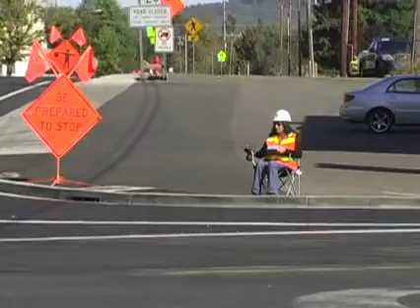It's important to conduct traffic volume studies, also known as traffic counts, because these counts are fundamental for all traffic engineering decisions within the Indian Reservation Road Program. And these counts directly affect how much funding can be generated for road or pathway maintenance and improvements on your reservation. Traffic counting is a basic planning tool that helps you to identify and prioritize current needs and forecast future needs. Traffic counts can ultimately lead to better quality roads that mean safer transportation for your tribal residents.

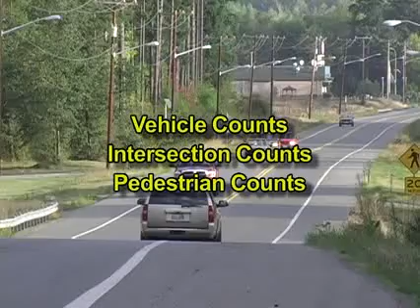This program provides a basic introduction to traffic counts and includes demonstrations for vehicle, intersection, and pedestrian counts. We'll show you the proper way to set up a traffic counter for vehicle counts and other equipment setups for other kinds of counts. We'll also show you how to download and process data that has been collected in the field.

Vehicular traffic counting results can include volume of traffic, direction of travel, vehicle classification, speed, and vehicle types. The Indian Reservation Road Inventory requires you to log both volume and vehicle classification.

When should traffic counts be conducted? As soon as possible. Counts can be performed any time of the year and in any type of weather. Counts on all roads should be kept current at a minimum of once every 3 years and preferably more often. Counts are usually done over a 48-hour period or longer. For inventory purposes, these should be done on what's known as representative days. That is, Tuesdays, Wednesdays, and Thursdays that avoid high or low volume days such as Mondays, Fridays, holidays, and weekends.

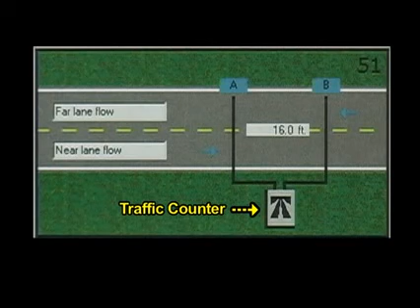Where should traffic counts be conducted? Traffic counts should be done at locations that provide uniform traffic flows. In other words, where vehicle speeds are unlikely to change as they cross the counter. For example, you shouldn't set up a traffic counter within 600 feet of a traffic light, intersection, or curve.

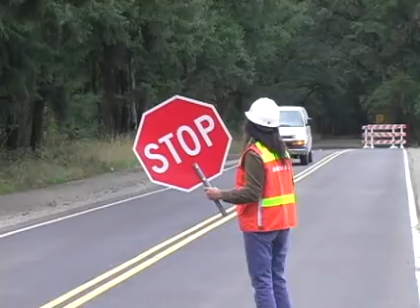To count the number and type of vehicles traveling a particular road, we'll demonstrate how to set up an electronic counter and road tubes. First, for your own safety and the safety of motorists in the area, you must wear a brightly colored safety vest while working on or near the roadway, and a hard hat. And in cases of high traffic volume or dangerous traffic conditions, we recommend using a flagger to allow traffic to flow safely while you are working. In addition, you must install a traffic control device 500 feet on either side of the work area. This is a sign advising motorists there is a worker ahead.

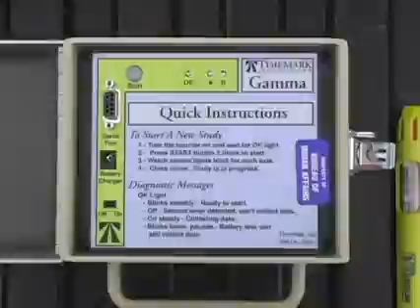Most of the tools and supplies you'll use to set up a traffic counting station can be organized and carried in a suitable case or bag, like this one. To install the counter, you'll need a sledgehammer, claw hammer, gloves, tape measure, chalk, and of course, the counter, with a fully charged battery, and 2 50-foot lengths of road tubes with chain and padlock. The expendable supplies that will be used include the following: 2 end plugs, 4 figure-8 clamps, 10 2.5-inch PK nails, 2 6-inch pieces of webbing, and a roll of road tape.

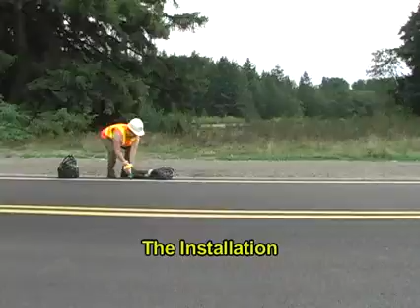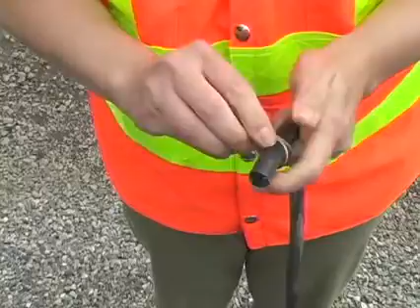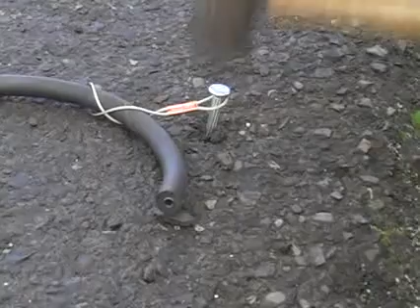First, you'll want to prepare the road tube by installing end plugs in one end of each of the road tubes. Next, you'll install the first figure-8 holder on the first tube. You slide that on about 10 inches from the end so that it will grip the tube. Then you'll nail that down to the edge of the pavement with a 2.5-inch PK nail, leaving a gap about the size of a penny. That makes it easier to extract it later on with the claw hammer.

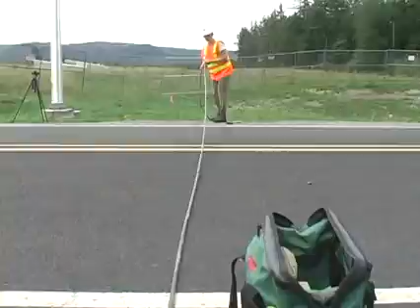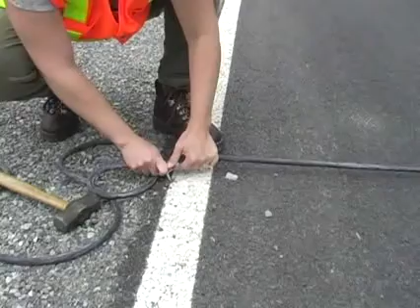After you have one side of the tube fastened, drag the hose across the roadway perpendicular to the traffic. Install another figure 8 onto the other end of the hose, and this one you'll need to slide down the hose and stretch it until you have a slight amount of tension in the tube. Pull on the hose a little more to tighten it a length that equals about 10% of the road width. And then you're ready to nail it to the asphalt.

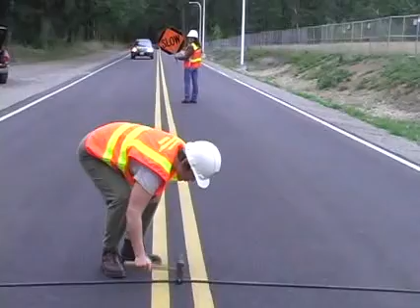To keep the hose from stretching excessively when it's hit by a vehicle, nail down the center using a length of nylon webbing. Just wrap it around the hose and drive a PK nail in on the center line. The webbing doesn't have to be really tight, just enough to stabilize the hose so it won't move when a truck runs over it.

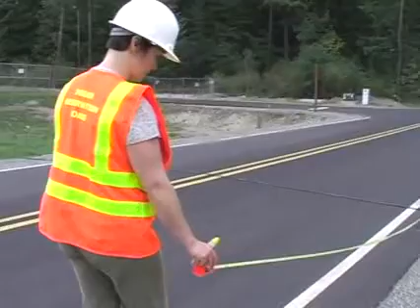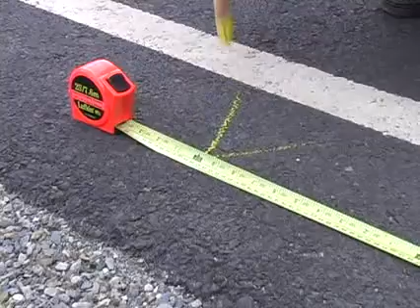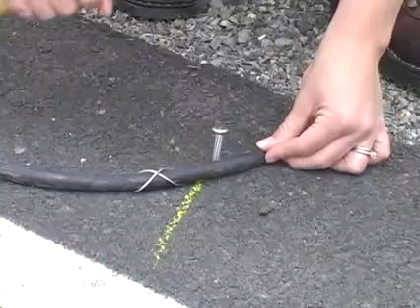Now you're ready to install the second hose. Every counter manufacturer has an optimum spacing for road tubes, and in this case the optimum spacing is 16 feet. So measure and mark that distance. Then get the second hose and prepare it by putting the figure 8 on it. Fasten it to the pavement with a PK nail as before.

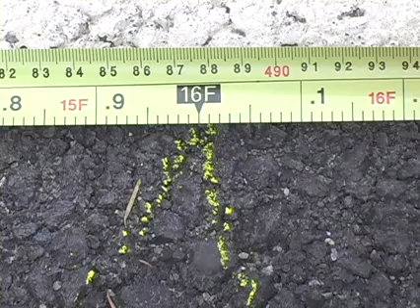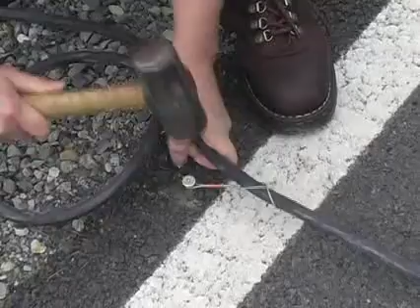Once that's done, stretch the second hose across the road and pull it tight. Measure and mark another 16 feet for proper placement. Slide another figure 8 on until it's a little tight. Then move it in another 3 feet or so to get the proper tension. Fasten it to the pavement with a PK nail as before. Again, nail down the center to stabilize the hose.

Once you have the hoses installed, you want to check and make sure you have enough tension in each line to keep the vibration down, and pull them to tighten if it feels like they need a little more tension. Then slide the hose through the figure 8 until it feels right. Finally, tape each tube to the road surface with the pavement tape placed between the wheel paths to further keep the tube from moving when vehicles pass.

And now you're ready to install the traffic counter. Open it up and turn it on. It'll perform a brief self-test and then tell you that it's ready to operate. To attach it to the road tubes, you take the rubber environmental caps off and insert the hoses onto each nipple. Now you press the start button 3 times, and now it's ready to start the count.

Now you test the system to see if it's collecting a count. You do this by having somebody stomp on the tube and watch the A light or the B light light up, depending on which tube they're stomping on. Or you can wait for a vehicle to go by, and then watch the light-emitting diodes flash.

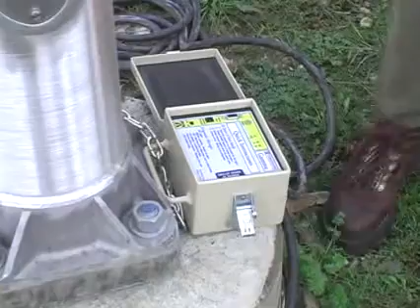Once you confirm that the counter is operational, fasten it to a pole, signpost, or light standard. Drop the chain through the handle on the side of the counter and securely lock the cover so that it's watertight. Pass the padlock through the chain and through the cover lock so that nobody can open the counter and turn it off or remove it from the location.

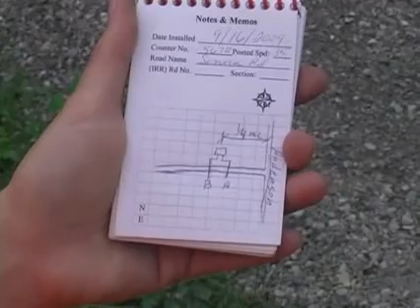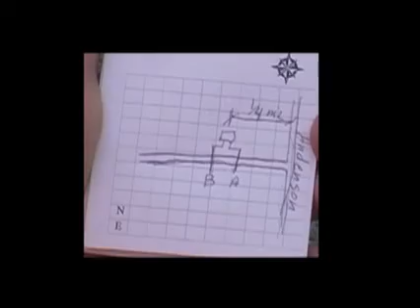Be sure to record the counter's location by making a sketch of the road system and marking the counter's distance from the nearest intersection. Also indicate the orientation of the A and B hoses so that later on, when analyzing the data, you'll know whether you're looking at traffic that's going east and west or north and south. At the top of the page, record the date you installed, the counter's serial number, the posted speed of the road, and the road name, so that later on in the office, when you're downloading the data, you'll know exactly which count you're dealing with.

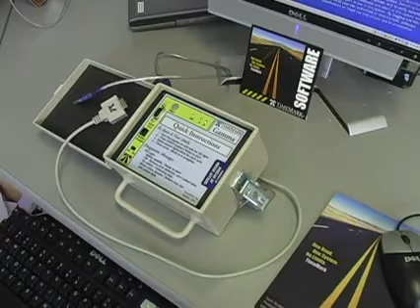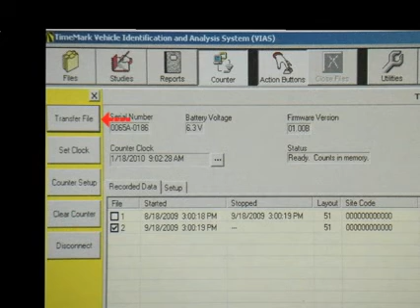Back in the office, you're ready to download the collected data from the counter to your computer. Each traffic counter manufacturer has its own software for downloading data. Open the counter software on the computer. Then connect the counter to the computer and turn the counter on. From the top menu, select Counter. Each different traffic count done in the field shows up on screen as a separate file. Select the file you wish to download, then select Transfer File from the left side menu.

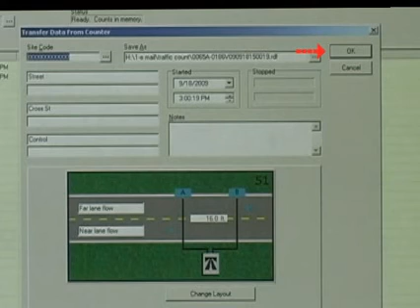A new transfer file window opens in which you enter the information asked for. In the site code field, put the street name. Under Street, again enter the street name. Under Cross St, enter the name of the nearest road that intersects your road. And under Control, enter the posted speed for that specific road. Under Notes, you can record minor details that may be needed in the future when analyzing this data. Then, in the upper right-hand corner, hit OK.

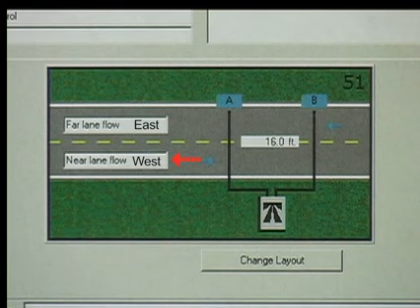A new window opens which requests file details. Verify the spacing of the hoses, which is 16 feet for our counter, and then for the traffic, signify whether it's traveling east, west, north, or south, so that in the future you'll know which direction the traffic's moving at this location. Then select Save File from the left side menu.

The Save As window opens where you can name the file before you save it. It's good to name the file using the IRR number, section number, followed by the year, month, and date of the count. Then select Save and the data will be saved to the hard drive.

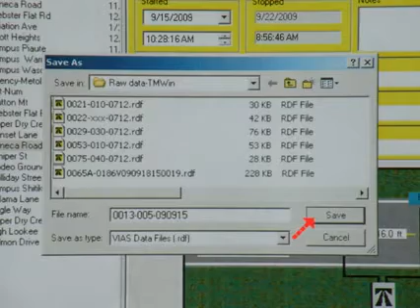The next step in analyzing the data is to do a study on the count. First, highlight the file you want to study, then select Load File from the left-hand menu. A window called Analysis Wizard opens. In that window, select what you want to do with the file. You may want to check the vehicle volume and classification of the vehicles in the count.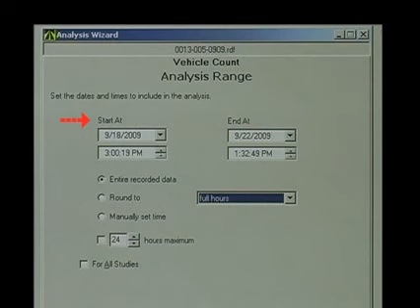Then you would hit the Next bar at the bottom of the window. The next screen in the Analysis Wizard opens where you would verify the start and the finish times you want the data to show. Then you would hit the Next bar at the bottom of the window. It'll ask you for the axle count time. Select OK. You can use the same start and finish times as used for the vehicle count.

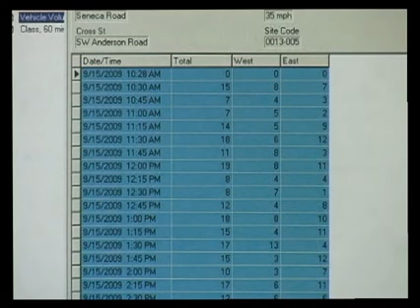Now the actual raw count data are displayed on the screen by date, time, and number and types of vehicles. The next thing you'll want to do is publish a report on this data. So highlight the type of data you want to report and then select Reports from the top menu. Choose View Report from the left menu, which opens the Report Wizard. This window asks you how you want the data presented in the report. What we want to use is hourly volume, weekly, 2-channel.

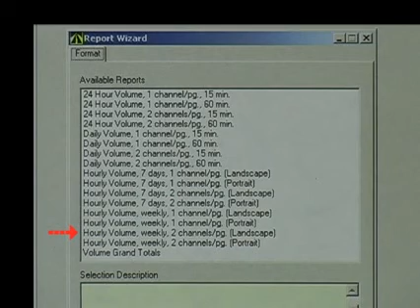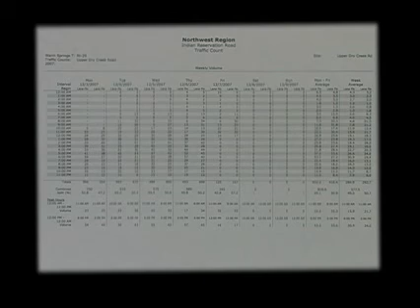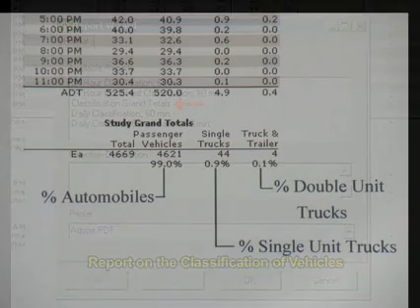The report appears on the screen and then can be printed. Select Direct Print from the left menu and the printer window opens, where you can select the number of copies to print. A printed report allows people to easily analyze the count data. Next, you may want to publish a report on the classification of vehicles, which tells you the percentage of traffic that are cars and the percentage that are trucks. This will give you an idea of how much wear and tear the road surface will experience.

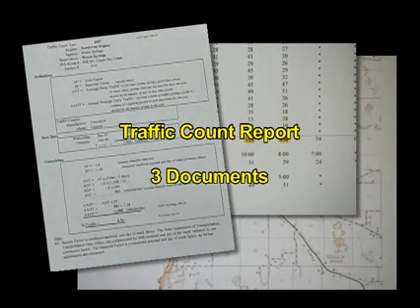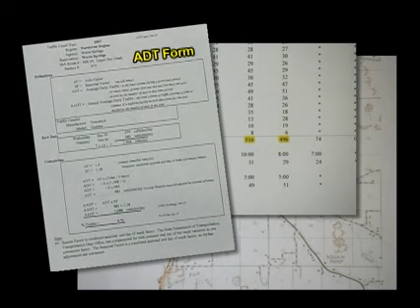Typically, when preparing the report for traffic count, you would include 3 documents: a map showing where the traffic counter was located, the results of the traffic count in the raw data report, and finally, the processed ADT form. To create accurate traffic count reports, you must use the seasonal factors, which account for historic seasonally high and seasonally low traffic days. If you don't adjust your data by multiplying these seasonal factors for the date of your count, the results will not be accurate.

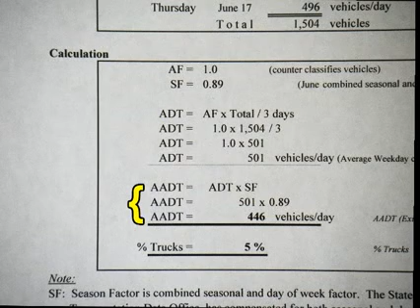The BIA can provide you with regional seasonal factors for your area, and factors are also readily available from your state DOT. For information on traffic counts or assistance with traffic count data analysis, contact the Northwest Region BIA Division of Transportation.

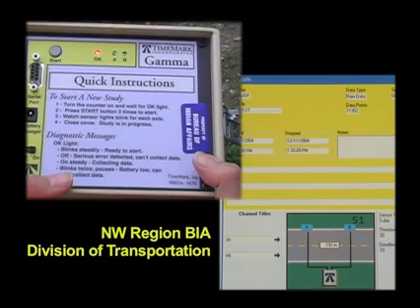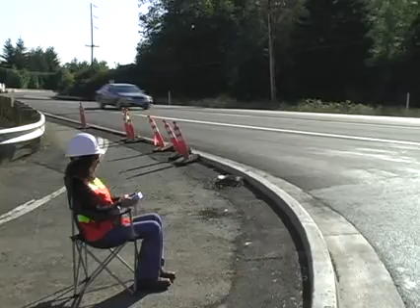Intersection counts, also known as turn movement counts, are often used to compute the maximum capacity for an existing intersection, to evaluate traffic congestion, to design or time traffic signals, to determine the need for turn lanes, and other reasons. Most often, a single observer using an electronic handheld counter and stationed in an out-of-the-way location performs intersection counts, though other methods are available. No flagger or partner is usually required for these counts, except that you may have observers work in 1 or 2 hour shifts.

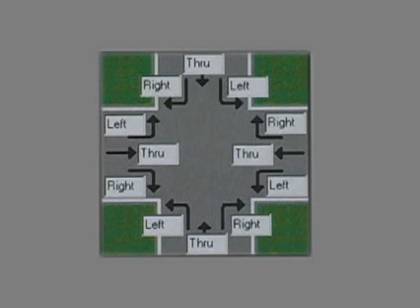A vehicle entering an intersection may execute one of 12 different movements, and each movement is captured on the device. With a little practice, almost anyone can become proficient in the use of an intersection counter. At busy intersections, 2 observers, each with their own counter and stationed at opposite sides of the intersection, should be used to ensure that turn movements for all vehicles moving through the intersection are captured.

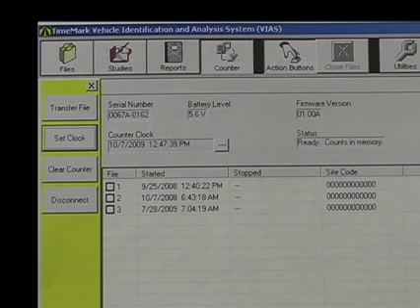Back in the office, you download the data from the counter. You begin downloading the turn movement data by connecting the counter to the computer and turning on the device. Following the same procedure that was used for downloading the traffic count data, input the data into the computer software. However, this time the transfer data screen displays an intersection instead of a road section. Enter the information requested, put the primary street name under site code. Enter the tribe, put the name of this cross street under road, and enter the posted speed of the primary road.

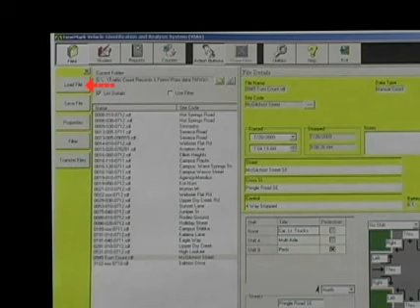At the bottom of the window, enter the names of the roads intersecting. Select OK in the upper right corner of the window. Next, of course, you name and save the new file you've created. To access the new file, you highlight it in the list of files and load the file. The analysis wizard opens again and you choose Turn Movement and hit OK. The file opens, displaying the time in 15-minute increments and the number of each type of movement through the intersection.

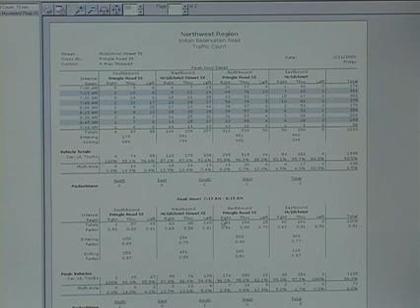To create a report, go to the Report wizard again and select the type of report. Then you can print out this report as a 2-page report. Page 1 is the raw data, and page 2 is a diagram of the turn count.

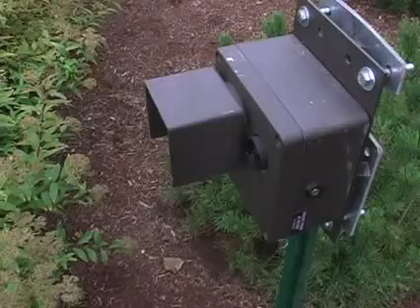Pedestrian counts are often used to evaluate path, sidewalk, and crosswalk needs, to justify pedestrian signals, and to time traffic signals. Pedestrian counts may be taken at intersection crosswalks, mid-block crossings, or along sidewalks. An electronic counting device with transmitter and receiver can be used in areas of low pedestrian traffic.

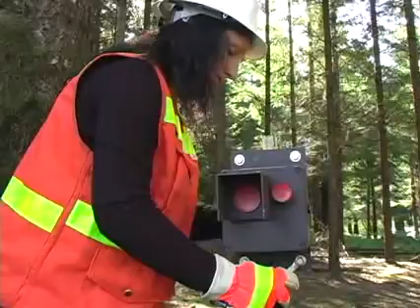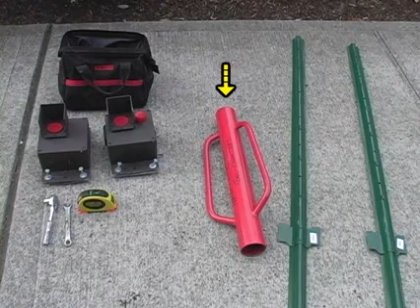The transmitter and receiver must be set up in an unobstructed location, so the beam is only interrupted when a pedestrian crosses. To install a pedestrian counter system, you'll need the following equipment: 2 metal fence posts, a post driver, the transmitter and receiver, a laser level, cardboard target, and a couple of adjustable wrenches to tighten the mounting bolts.

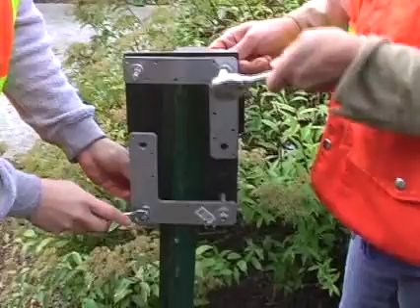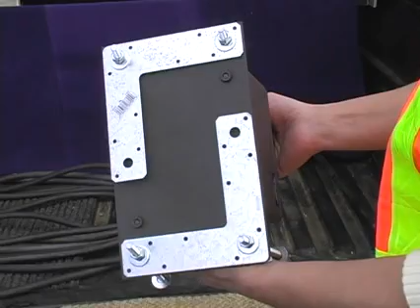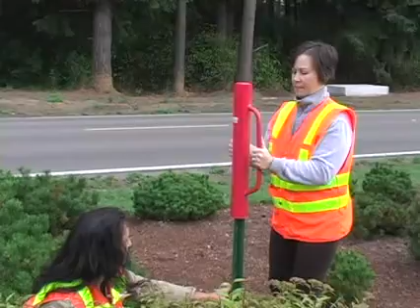If the transmitter and receiver don't already have mounting brackets attached, you'll have to purchase 2 metal L brackets, 4 sets of bolts, and nuts for each unit. Attach the L brackets to the back of both the transmitter and receiver as shown. Once you've identified the location where you're going to take the count, begin by driving the first fence post in the ground on one side of the pedestrian walkway.

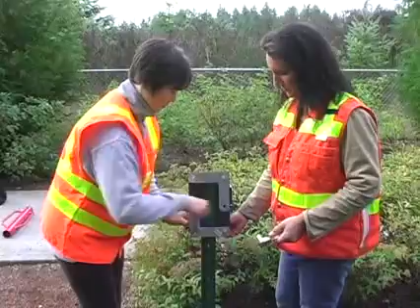Next, mount either the transmitter or receiver on the post using the previously constructed mounting brackets. Since the actual counter is located on the receiving unit, make sure the receiver is installed in the most accessible location. Next, place the laser level on top of the unit you just installed, right above the lens, and turn it on.

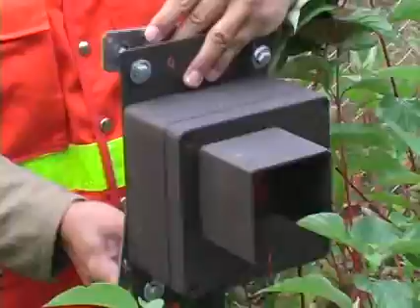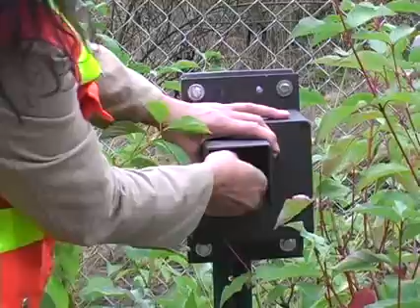Using the sheet of cardboard as a target, stand on the other side of the pathway and locate the laser beam. The location of the laser beam will indicate where you will install the other unit. Trial and error will help you figure out the best position for the support post and the counter. Make sure there are no leaves or branches that obstruct the beam. Remove the lens cap from both the transmitter and receiver and then switch on the power for both units.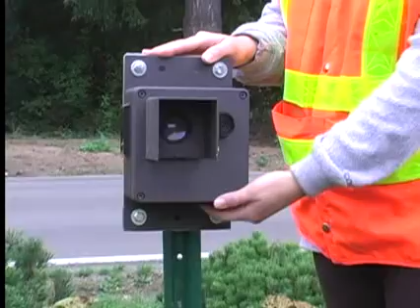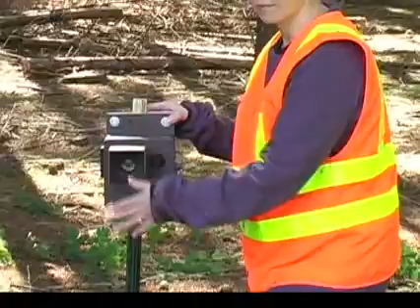Before the setup is complete, the system must be thoroughly tested to make sure the beam is aligned and everything is working properly. To do this, turn on the horn or sound element located on the receiver. If the transmitter's beam is reaching the receiver's lens, the horn will be silent. Once the transmitter beam is accurately aligned, the horn will sound only when the beam is interrupted. When this happens, the system is set up properly.

Each time someone crosses through the beam, interrupting the signal, the counter, which is located on the side of the receiver, advances one number. For normal operation, turn the horn off. The length of time the counter is left in place is determined by the number of days of pedestrian traffic you want to count. However, on this particular unit, you must download the count data before the counter reaches the number 3000, which is the unit's maximum storage capacity. Also, the batteries need to be changed about every 6 months.

To retrieve the data from the pedestrian counter, you connect it to a logger. This can either be done in the office or in the field. The process is automatic. Once you have the data on the logger, input the data into the computer software. Each traffic counter manufacturer has its own software for downloading data. With the software Boxcar Pro, you can extract the data from the logger and put it into an Excel spreadsheet.

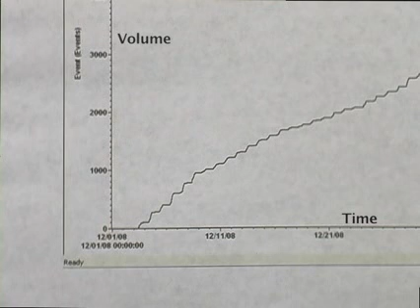The way we do that is first we go up to the menu bar and we select Readout Logger. The data is downloaded. The screen displays a graph showing the volume and the time. You can toggle the view to show the data when the pedestrians actually broke the beam. And then we can go over and export that to an Excel spreadsheet. To generate a report, select the Export Excel Spreadsheet icon on the top menu.

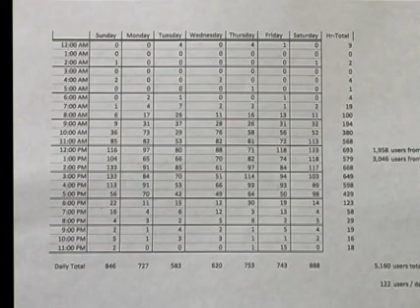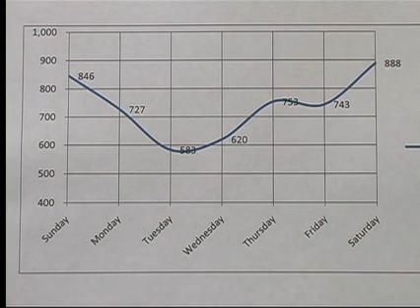On the Excel spreadsheet, each event is shown by date and time. The start and finish date are shown, along with the duration and the total number of events. You can use the Excel spreadsheet to extract the data for presentation. For example, you can show events before noon and afternoon, events on weekdays or on weekends.

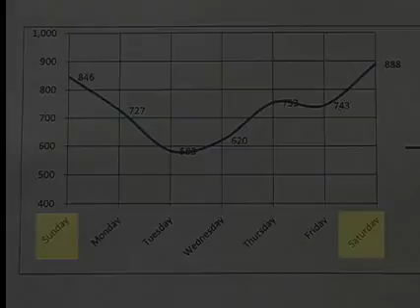The importance of doing accurate traffic counts cannot be overstated. They help you identify potential safety hazards such as excessive speed locations and provide the information needed to secure funding for roadway maintenance and improvements. The payoff will come in the form of a safer and better quality transportation system for your reservation.